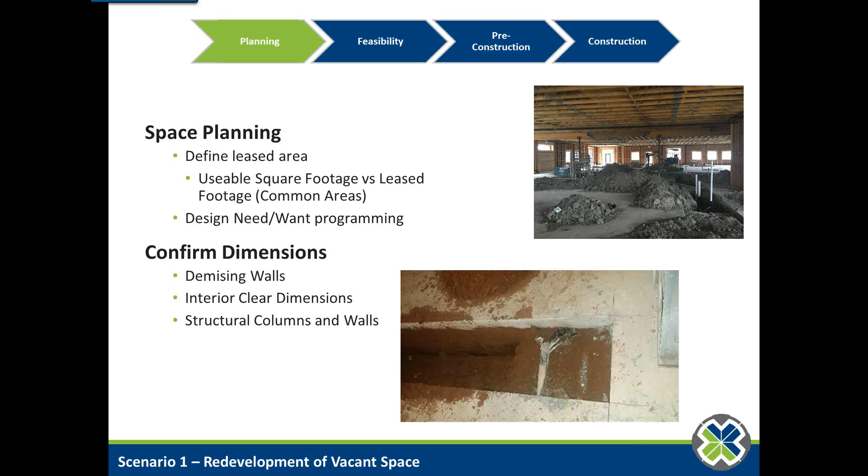Let's move to this next one. Needs assessment is one very important part, and a lot of times our clients don't ask this if we're not involved. They may ask themselves: what am I expecting cost-wise? How long is this going to take? Have I considered my image or visibility from the exterior of my space? Do I have any special access considerations?

I'll give you an example. Same thing with licensing considerations—maybe you're an ambulatory dental facility or something similar. A lot of our ER clients have the same consideration: is there access to the space within this leasable area for a patient drop-off or pickup, or even ambulance pickup or delivery? Likewise with licensing considerations, if the Texas Department of Health has specific requirements for the space, will this space meet those needs? All of these are very important questions that need to be asked up front, but unfortunately aren't always asked.

Imagine closing on the space and paying rent, and then finding the landlord won't allow you to add a canopy over a patient drop-off or pickup area. That's devastating. Likewise with future expansion—we talked about your space needs versus wants. You may currently only need 3 operatories, but want to move to 5, add more hygiene areas, expand into another focus, or bring on a partner. We want to make sure those considerations are taken into account before we move into construction.

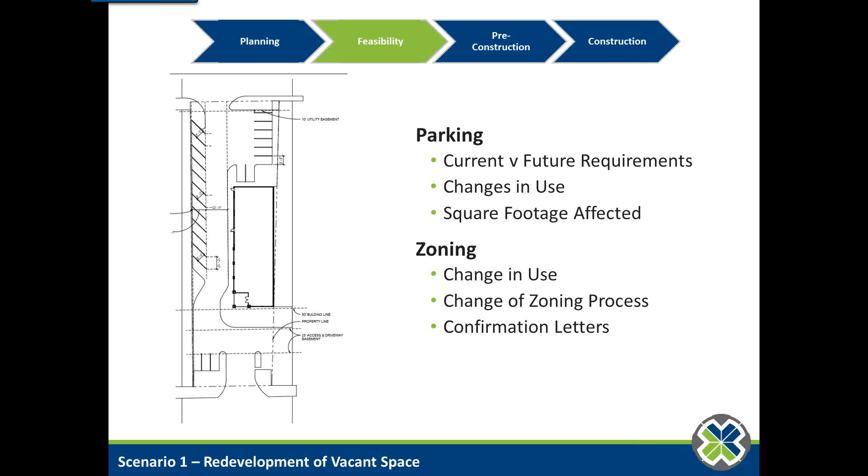Another piece I definitely want to touch on, and again it's a little bit scary, is asbestos and structural considerations. So we'll start with asbestos. There's a misconception in the construction field today that asbestos surveys or investigations to see if asbestos is in the space you're occupying are not required on buildings built from 1990 and later.

That is a false assumption. We had a situation where a general contractor moved into a space and did not perform the asbestos investigation. A Texas Department of Health inspector happened to be driving by, came into the space, and asked for their asbestos investigation and notice of demolition filed with the state. It was not in place. There are heavy penalties and fines from the state of Texas for failure to notify. This is required by the state on every project involving any sort of demolition, and it continually bites general contractors and clients who don't know about this in advance.

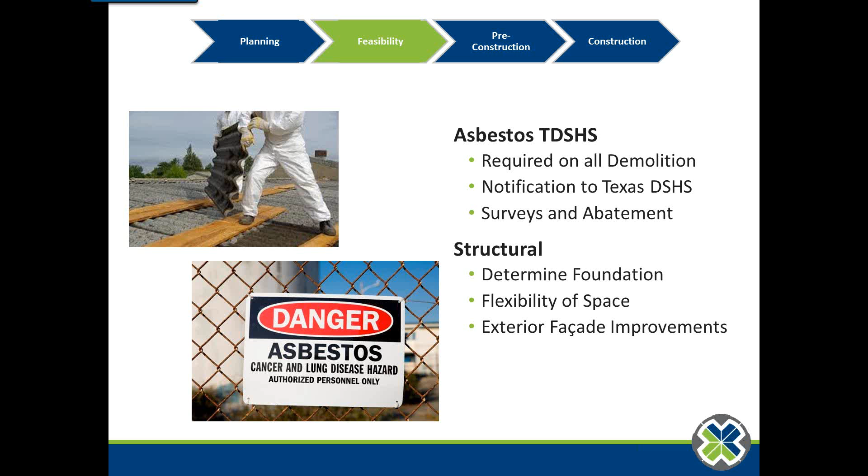The next piece is structural—determining the foundation and the flexibility of the space or exterior facade improvements. I'm going to show you a couple of examples of this and why it's important.

So what we did is go in and perform a foundation or structural inspection on this facility. We determined that the foundation was not adequate to support additional structure, but we determined what steps were needed to be taken. So now we've identified what cost implications we have before we even close on the site. I'm going to show you the vision now.

The vision was this, and with the structural modifications we determined, the investigation we did, the coordination with the city, and all the due diligence pieces, this is a completely viable project. We're able to move to construction, and they are moving to construction next month. Without this preparation, you could be blindsided with significant structural changes or the inability of the structure itself to support your vision, and then you have to go back to the drawing board, which none of us wants to do.

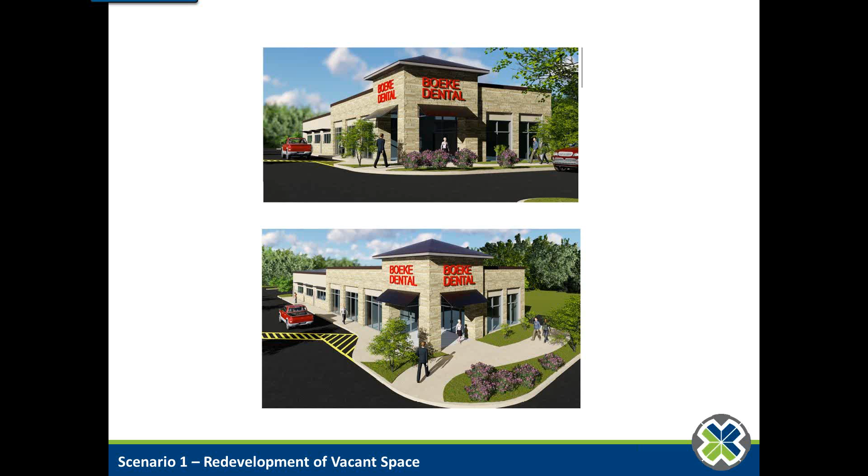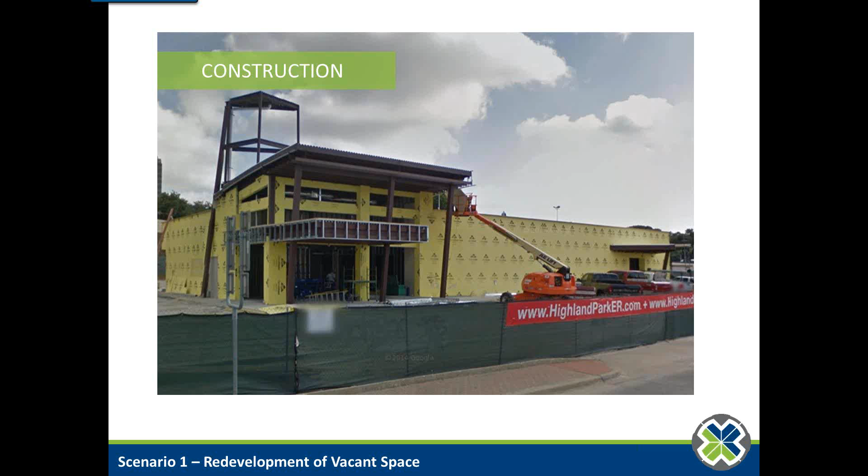The other thing to consider when going into an existing space, and this holds true throughout the other phases of construction, is service availability. Is there adequate water and sewer service size to your facility, or electric load capacities, or will fire suppression be required? I'm going to give you an example of this.

You go into a space and make dramatic improvements like you saw with the liquor store. The city can very easily come back and say, well, you've modified the use and brought the building up by so many dollars in improvements—now we're going to require you to add fire suppression to this building.

Same thing with electrical load capacities. You're adding a pano, or other X-ray equipment, or other high electrical need equipment. A lot of retail spaces are set up for 200 amp service, where most of our dental suites are going to be 400 amp plus. While it's not super difficult in some situations to upgrade, in other situations it's extremely difficult. Space limitations in the panel, accessibility to bringing in additional electrical service, or even sometimes other transformers to the site, not to mention the landlord may or may not let you make those modifications.

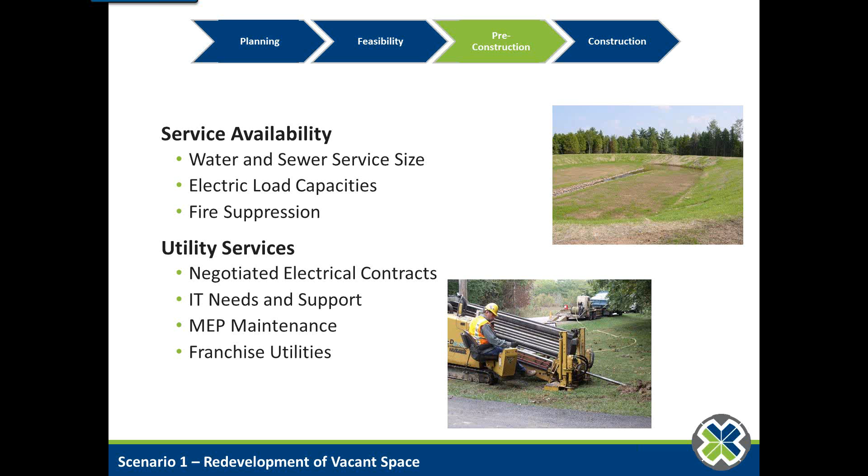MEP maintenance: will your landlord maintain your heating and ventilation system, or your air conditioning and heating? That's what the MEP is referring to here. And likewise with your franchise utility, setting up your electric, water, gas, sewage, and trash. So all of these things, if you're caught with it at the last minute, it's not comfortable. We want to make sure that you guys avoid that too.

Here's an example. A client was not aware of what phone system they wanted to use. They decided they needed category 5, which is a typical telecommunication or internet type phone cabling. They did not know how many pairs or wires they needed to run to each location, so they said to go with one wire. What ended up happening was the phone system they used required two to every location. It seems simple, but now we're cutting sheetrock, or they're pulling more wires and disrupting you, and it's time, money, and inconvenience that can be avoided very easily.

Not to mention, setting up your franchise utilities can take anywhere from 60 to 90 days. So we want to make sure that, if your construction time is only 90 days, you're not in and operating without phone or power service to your space.

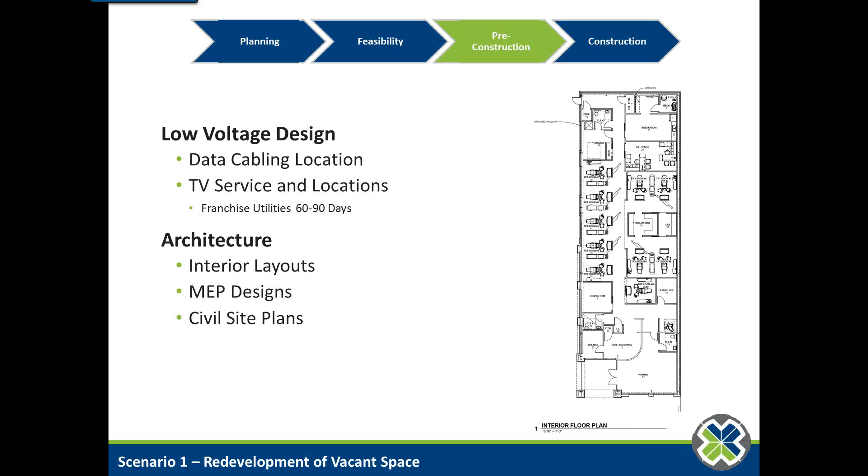We put a comment on here about architecture, interior layouts, MEP design, and civil site plans. Obviously we want to have all of these complete before we move to construction. But if we haven't, as we'll talk about in the bid negotiation, started making these considerations early and vetting this process out, in some cases you can lose anywhere from 30 to 60 days very easily.

One of the other pieces when you go into an existing space you want to consider is HVAC warranty. A lot of times there's existing HVAC systems on the building, and we want to make sure someone tests that and confirms it's adequate for your space and your needs. We also want to ask: is the landlord going to be responsible for this maintenance? Is the landlord going to be responsible for supplying new units if they're not adequate or functioning properly? And what warranty they're going to provide or not provide. Those are all very valid questions, but they can come back and bite you very quickly, and I'm going to show you some examples. Same thing with the roof and the waterproofing. I'm also going to show you some horror stories on this.

In most cases, the landlord is going to warrant the roofing system on your building that you're moving into. They're also going to require that your general contractor, whoever you choose, uses their approved roofer, to maintain the warranty on the building. There are many cases where general contractors void your warranty and you're stuck paying that bill. We don't want that to happen.

And then, determine shell waterproofing pitfalls. I want to jump in real quick to show you some examples of HVAC issues and roofing and waterproofing issues. What we're looking at here, I'm going to use my pointer.

This is the inside coil of an existing air conditioning unit on a space that the landlord said was adequate. Very easily caught by an HVAC company that came out and did a site survey for us - the coil was indeed rusted, and here's the big M word, it was full of mold. No one wants that blowing through their facility. Had we moved to construction planning on this being in place and existing, the general contractor wouldn't have included it in their budget, we wouldn't have included it in our budget, and our client would have been stuck paying thousands of dollars for a new air conditioning system for their space.

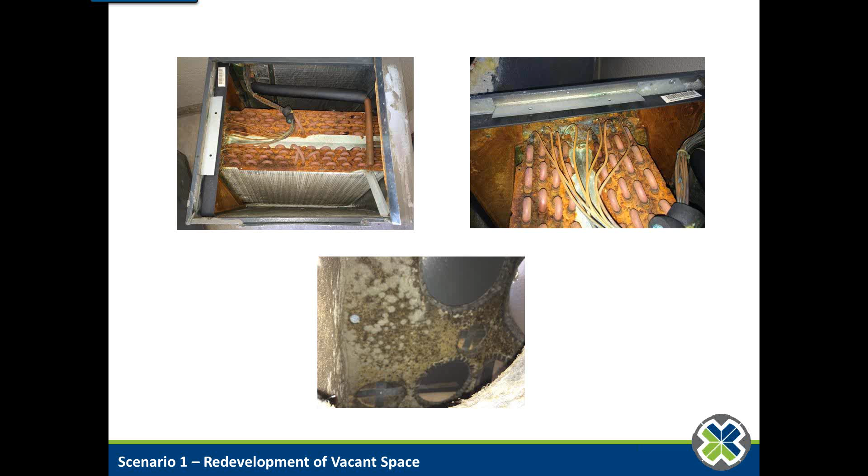So identifying this early on is very integral.

This next picture is going to be a little difficult for everyone to see, so I'll explain. This is a vertical wall in a space, and we're looking up at a roofing system. You can clearly see where the insulation was torn out. I show you this because this is a building where the landlord is quote-unquote warranting the roof. There was a roof leak prior to construction - the general contractor noticed it, pulled the insulation out, and what we exposed was, simply put, a patch job over an inadequate roof system.

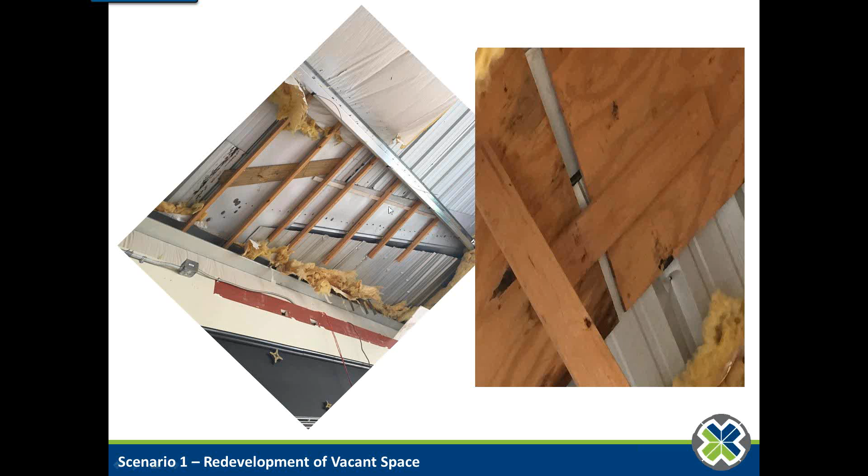And we'll look at this picture next to it, and you may wonder what that is. Here's what that is - it's a Band-Aid to conceal what I'll call, again, the inadequate roofing system. I show you this because it was covered with insulation, and a lot of this, despite everyone's best efforts, is not going to be visible.

The important part of this is that the landlord was identified early on, before we moved into lease, that they were going to warrant and maintain this roof - and that's indeed the case. But I show you this to tell you that this happens, and it happens regularly across the state and in different markets.

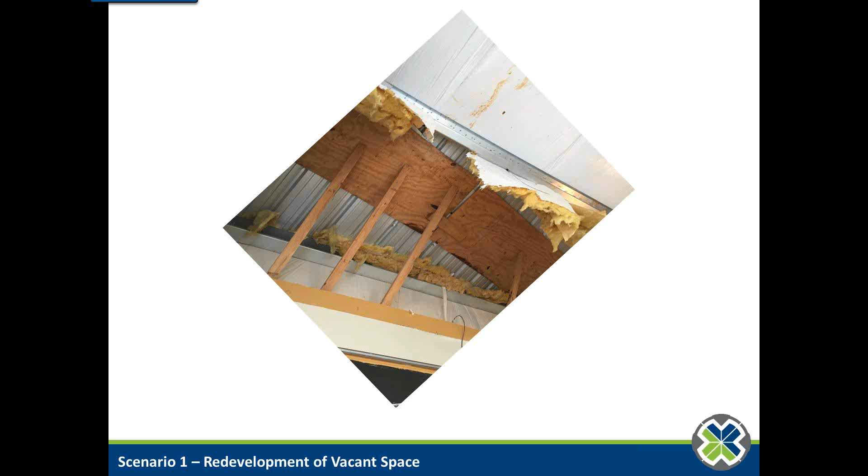We have seen and heard of many situations where you have water leaks and penetrations into your space. They can happen early, which would be fortunate, so we could catch them and have the landlord resolve that if they're willing to. Or it could be more of a detriment - you could be a week before you open your facility, we have rain events like we've had over the last 30 days, and your space floods. We want to make sure this is addressed up front with the landlord, that they are responsible for these window systems. I've had plenty of bad experiences, even in my construction days, with how these windows are improperly or properly installed and maintained.

Final piece that we're going to tie this back to is GC selection and negotiation. We've talked about some horror stories, and some situations that can be easily avoided through prior preparation.

One good way to do this, if you have a project management team in place or someone who can handle bid negotiation and solicitation, is starting with a competitive and competent pool of general contractors after you have your preliminary designs and everything in place. Putting it out for competitive bid negotiation, you're avoiding excessive cost and duplication of costs - all the things we've talked about previous to this.

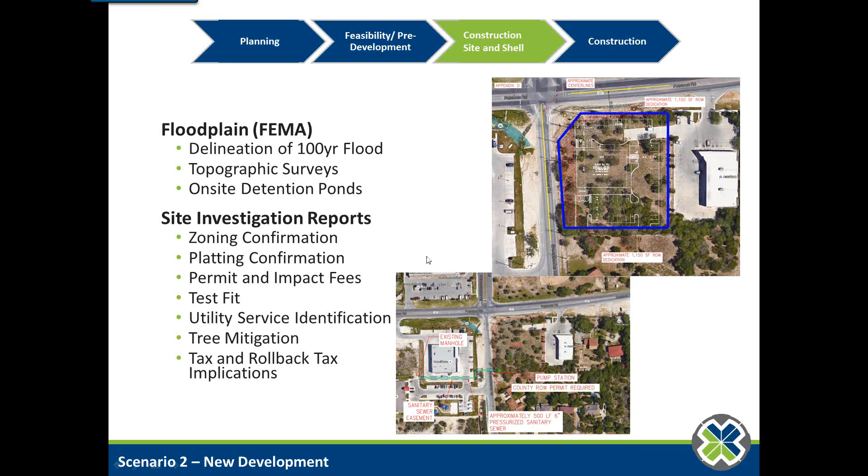Now, the remedy here is that they're on the hook for the cost of this. Had the planning been monitored up front through the construction process, I'd say the situation wouldn't have happened. But it's an unfortunate oversight by the civil engineer and the general contractor. This is a client friend of ours, so we have very intimate knowledge of this situation, but we don't want this to happen to any of you guys either.

Another portion of the construction site and shell through the feasibility period would be ALTA survey, which is just a more detailed version of a land survey. And then title - that goes directly into the title commitments, which go into the survey.

Platting considerations we hit a little bit earlier - do we have to replat this, and if so, how long will that take? Are there easements that affect this site? I want to show you here, this was the site we looked at prior, and we were going to occupy this entire site. Well, there's an easement here for cross access, but there's not one here, and this is an existing space. So had we not negotiated cross access agreements with the neighbor, part of our building would be landlocked, and we definitely don't want that to happen either.

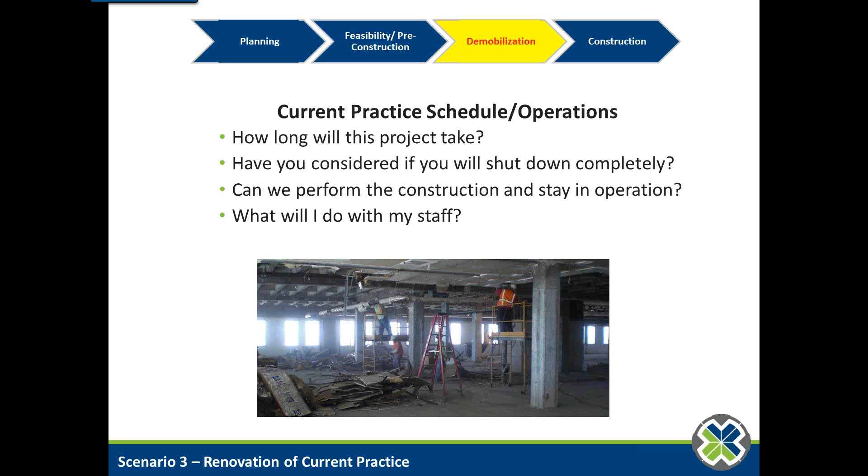Demobilization is a really big one, and I think what happens when you talk about renovating a current practice or space is there are a lot of questions, and you may not even know where to start. So here are some general questions for you. How long will the project take? Have you considered if you'll shut down completely, or will you continue to operate while construction is going on? And what in the world am I going to do with my staff? Are they going to work part-time, or are we going to coordinate this during a holiday? A lot of times that's a very tough question.

Not to mention logistical considerations. For instance, how are we going to remove this equipment, especially if we're doing this in phases? Where will we store these items during construction?

Where will we store these items during construction ties directly into coordination with the landlord. Too often you have these plans, you've decided how you're going to do this, maybe in phases, and you're going to store it all in a Connex box or storage container with a forklift. You get it all done, get it out in the parking lot, and the landlord comes to you and says, what are you doing? You're not allowed to do that. The city might have given you a permit, everything could be copacetic, but then the landlord makes you remove the container, and what are you going to do now?